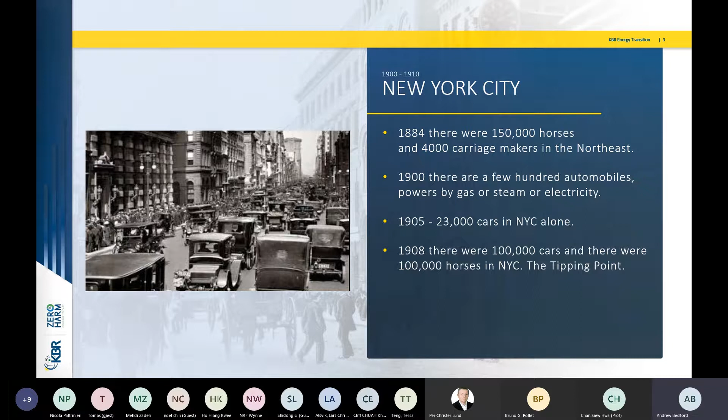Singapore, being Singapore, is planning very well for this stuff, and realizes it has to take action to meet its decarbonization targets set for 2030, then reduce as fast as possible to net zero by 2050 or thereafter. They've identified a number of ways to do this: natural gas, solar, regional power grids — which they announced in the past week or so for International Energy Week — and also low carbon alternatives that hydrogen could well fit into.

So hydrogen is not a new topic. It's obviously been around for a very long time and known about for a couple of hundred years, as well as electrolysis. There's been a lot of hype in the past, and there's been moments of hope when it hasn't quite taken off.

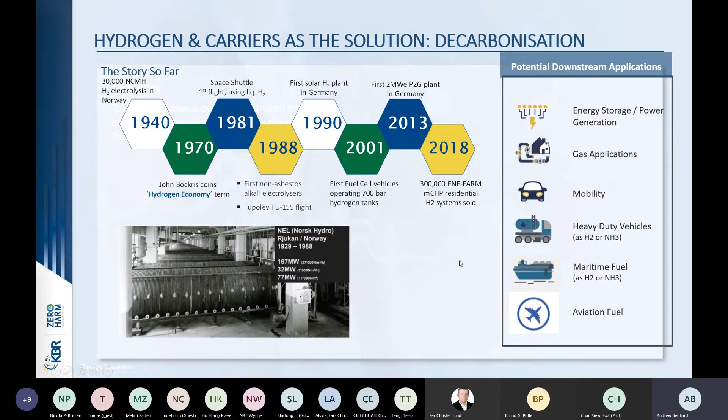KBR has been working on a hydrogen feasibility study with NCCS, NRF, and others. I won't go into those details, but I'll talk in general terms today. There's a number of downstream applications that could include power generation, city gas, mobility, and potentially bunker fuel as well, or aviation fuel with fuel cells.

So I'll sprint through this, but it looks like supply growth going forward will increasingly be renewable. It's carbon free, and the costs are becoming very competitive in most locations, especially where there's no grid. It's already the most economic way forward on the whole.

JX we're working with at the moment in Malaysia. They've got their own big plans for large-scale hydrogen production with CCS as well, to supply Japan, but perhaps the surrounding region too.

Really how it works is, as I suspect most people on this call know, there's going to be many global potential sources of hydrogen. It could be where there's existing gas with CCS, so people are discussing low carbon gas these days. For Singapore in particular, you could either bring that gas in as low carbon gas, or you could do CCS in Singapore. You could also potentially produce domestic sources of hydrogen from biogas, but that is rather limited, as Singapore has a unique context as a city-state with limited land area.

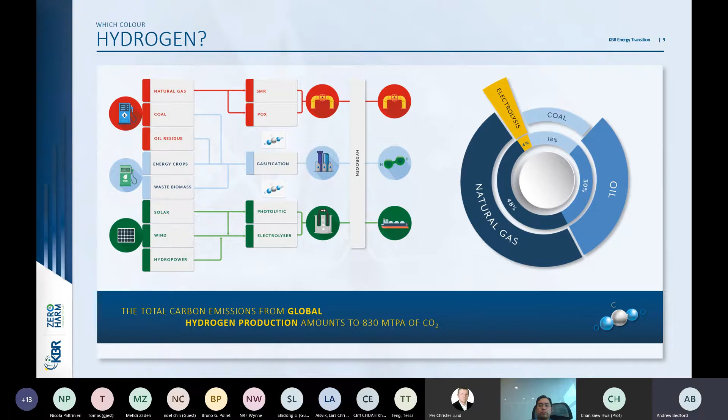Okay, so there's many colors of hydrogen, which I won't go into the details of, but there's turquoise, blue, purple. There's nuclear hydrogen production being planned. I don't expect that would really fit into the Singapore context unless there's a neighbor with that in the future. But yes, I think the vision is green at some point in the future, though it's very hard for it to compete at the moment.

There's lots of predictions about the market and also potential for methanol with carbon capture, or ammonia as a carrier for hydrogen, which could also be used directly for powering coal power stations in Japan, which they're planning up to 20% in one of those coal power stations initially as a full-scale pilot with JERA, I think. Mitsubishi and others have also already tested 30% co-firing of hydrogen in a combined cycle gas turbine, so they would be able to bring in ammonia and use the waste heat from the turbine to crack that ammonia and mix it—it'd be really HENG, or hydrogen enriched natural gas, which would be injected into the gas turbine.

The benefit for Japan would be reduced carbon emissions if it's from a green source or with carbon capture, and more diverse sources of energy.

There's very public examples from BP and Woodside and the Hazer Group and others, some of which might have potential to export. I think the difficulty will be finding those companies with the cash and the credibility to realize those visions.

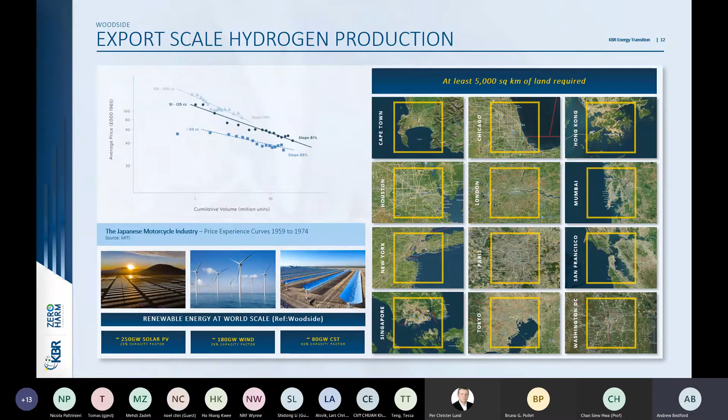So they need about 250 gigawatts of solar across that area to produce that amount of energy. And I think every year there's about 10 to 20 gigawatts of solar production, so it would take 10 years to produce enough solar panels to cover that area alone - current production, which is increasing rapidly, but not quite enough.

So it will take a while to build up and go through this transition, which makes it more likely that the blue sources of hydrogen from gas, most likely - some people are looking at coal - with CCS are more likely to win out initially, really because they're cheaper, and the technologies for carbon capture, which we've been looking at in great detail, are improving and coming down in costs.

So there's people saying $30 a ton of CO2, which is very competitive when the European price of CO2 is around $20 at the moment - so it's not far off being competitive. And Shell has recently announced their own hydrogen division of technologies, which they say is now competitive at that carbon price. So it feels like it's moving much faster than people realize, the CCS element here.

And that will probably drive the transition and ensure that that requirement for gas continues for at least the next decade, just because the scale of this challenge of decarbonisation is so big.

And then I've put this sort of process flow scheme in here as an example, whereas it's got ammonia, but it could actually be an MCH plant, which is Chiyoda's technology, or SPERA, or it could be a methanol plant combined with CO2, because any of these could be a carrier for hydrogen.

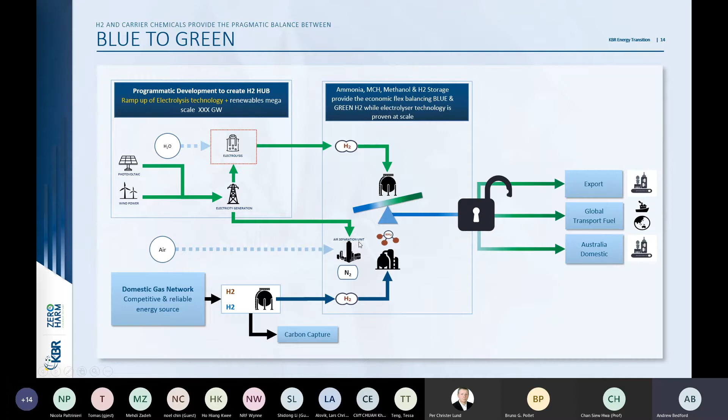But these carrier chemicals might help unlock the export supply chain, because liquefied hydrogen is currently very expensive, isn't so efficient, and there are a number of challenges around carrying hydrogen in liquefied form or compressed, for that matter.

So this slide just talks about the challenges of developing the hydrogen supply chain: its power supply, the supply chain itself, establishing it, the logistics, the offtake - who are the off-takers is often a big challenge for those Australian projects, a number of which we've worked on at concept stage. They're all grappling with that problem.

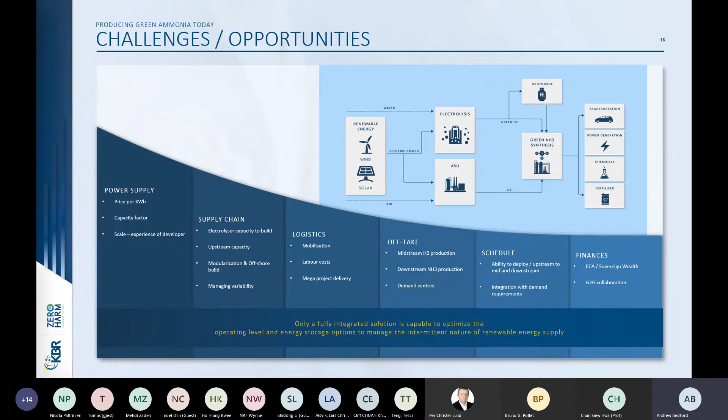So the off-taker is one issue, that you need to make the projects bankable. And often it looks like you would need government support to get any of these projects off the ground. And a carbon tax would certainly help.

Each of the carrier chemicals has their own pros and cons: ammonia, methanol, MCH, and liquefied hydrogen. The advantage of MCH and ammonia is that you can often reuse existing infrastructure and vessels, whereas liquefied hydrogen would, on the whole, require totally new infrastructure. This would suit the longer term, I suspect, as volumes of hydrogen required across the supply chain and by off-takers increase. At some point in future the volumes become so large that it doesn't become economic to move these liquids around, so you'd want to switch to liquefied hydrogen, but the point at which that happens is certainly up for debate. There are pros and cons around the other two as well, so we keep a very open mind around these.

And Andrew, we're running a bit out of time, if you can come to your conclusion. Yeah, sure, let me just check which slides I've got left.

Okay, so in Singapore itself, the challenge is how do you apply and where do you apply hydrogen first, and which sector do you give support to in terms of an off-taker? Mobility is often the highest value sector to support, where you're most likely to make some money, but Singapore is a unique situation where there isn't a big mobility market. There is some heavy haul and bus fleets that might make sense in terms of business operation security, but for the mobility sector itself, cars make just as much sense to go electric, as the distances covered aren't so large.

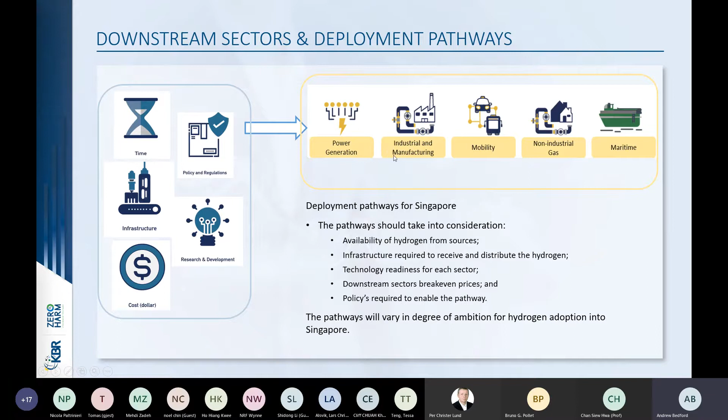I borrowed this picture from Professor Ho's slide last week at the Nordic conference, where they presented some ways forward from the NRF's perspective. They said there's potential to blend hydrogen into CCGT, and looking at turbines, hydrogen fuel turbines. There's also potential in other sectors, in particular marine, with hydrogen fuel cells and ammonia as a bunker fuel, or methanol, because most vessel manufacturers are looking at tri-fuel vessel engines going forward over the next couple of years. They're starting trials, and heavy haul vehicles, like I just said.

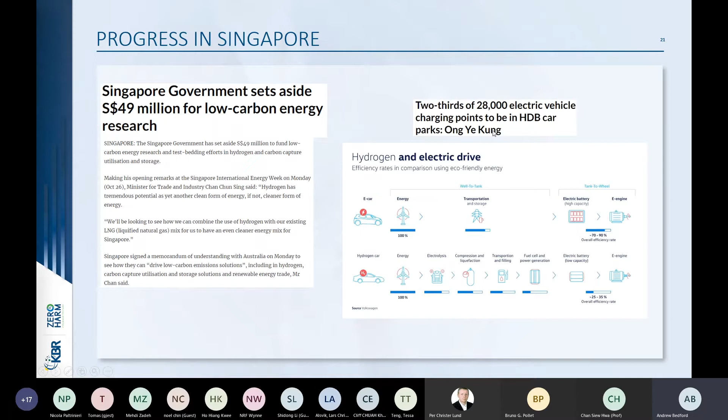So that's a very brief summary of my perspective on the hydrogen supply chain for Singapore. I just thought I'd highlight a couple of announcements in the past few weeks: the MOU between Australia and Singapore, where hydrogen and the supply chain is one of the key areas mentioned in decarbonised energy supplies, and also the electric vehicle charging network, which really supports the view that EVs make a lot of sense for Singapore for the smaller vehicles in particular.

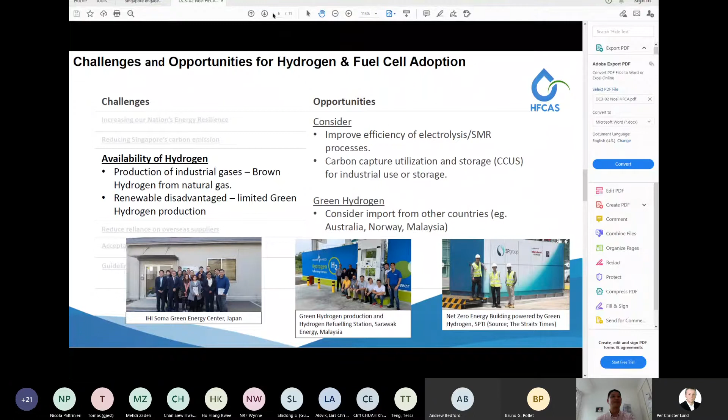Reducing the reliance on overseas supply. We have very few locally developed solutions. However, we can take heart that we have a couple of local companies who have already taken the step towards commercialization.

One of them is OneBerry, a local SME specializing in security and surveillance, providing island-wide stationary cameras powered by solar as well as methanol fuel cells. We also have Duralite Power, a spin-off from Temasek Poly, manufacturing its own fuel cell that was used for UAVs, very similar to Spectronik, which is also doing the same thing.

We also have Prof Chan and his team, who have developed numerous patents on catalysts used for fuel cell and hydrogen generation and purification. They have also collaborated with many international universities.

So the question is, can we identify a niche area where Singapore is able to develop its expertise, for example membrane technology for fuel cell as well as electrolysis, similar to what we did for the semicon industry? If we are able to identify that niche area and build on that, it will put Singapore on the map again, not just a tiny red dot, but a big blue.

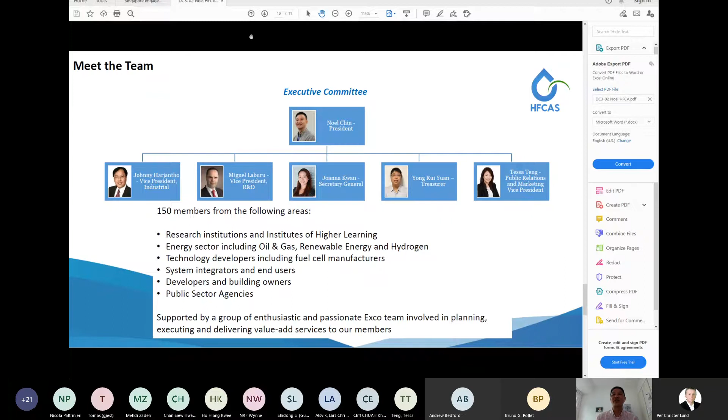Our next speaker is Professor Bruno Pollet from NTNU, Department of Energy and Process Engineering. He will make a presentation on hydrogen research in Norway. Bruno, please go ahead, if I can actually get that presentation going.

My system is actually crashing, which is not great. That's Sod's law, as I call it, yeah?

Can you see this? Yes. Brilliant. Okay, good afternoon, good morning everyone. My name is Bruno Pollet. I'm going to give you a quick snapshot on what we do in Norway in terms of hydrogen research.

First, I would like to give you a bit of a flavor of NTNU Team Hydrogen. We are actually the largest hydrogen R&D cluster in Norway, with over 40 professors looking at really the value chain of hydrogen fuel cell R&D.

We have PhD students, research students, and master students working with us. We actually tend to publish a lot, to patent a lot, and we are also open to international research collaboration and exchanges.

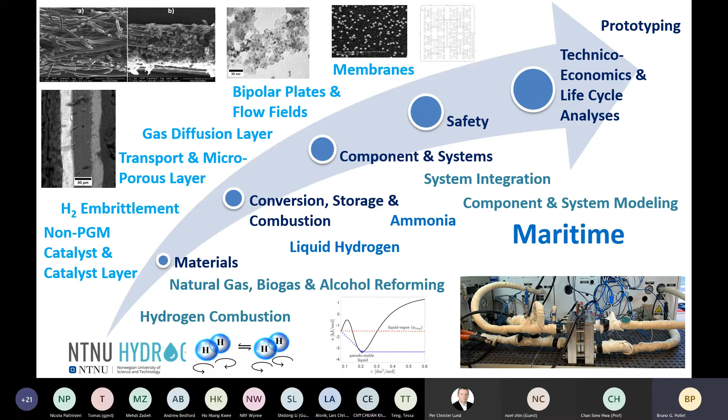When it comes to infrastructure, which is very important, we have a quite large R&D hydrogen infrastructure dotted across Norway, in Oslo and Trondheim as well. We're looking at high temperature fuel cells and electrolyzers, but also low temperature fuel cells and electrolyzers.

Each region and each university and entity has its own R&D facilities. The Norwegian Fuel Cell Hydrogen Center is split between the Institute for Energy Technology, NTNU, and SINTEF. In Trondheim, for example, where I work, we focus more on alkaline and acidic electrolyzers, and also fuel cells, so PEM and alkaline fuel cells. We're also looking at direct methanol fuel cells for portable applications, and in Oslo, solid oxide fuel cells and solid oxide electrolyzer cells.

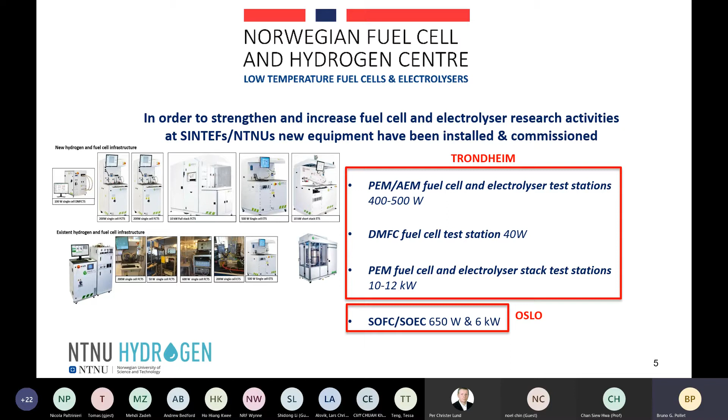We are now in the process of extending the Norwegian Fuel Cell Center to accommodate manufacturing capabilities, which is very important for prototyping. There's also other infrastructure in place for more ex situ analysis, from spectroscopy to fundamental electrochemistry for catalysis, for example. We've been quite lucky to get some very strong nanolab funding and infrastructure to look at nanomaterials and all the specifics around spectroscopy analysis.

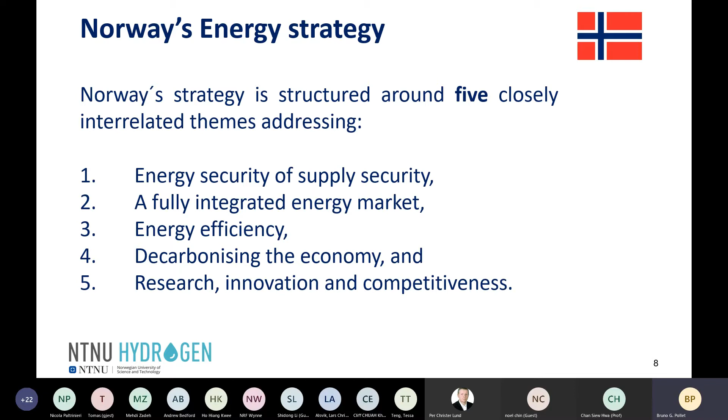So hydrogen in Norway, the strategy is structured around five themes: energy security and supply security, a fully integrated energy market, energy efficiency, decarbonization of the economy, and a strong focus on research, innovation, and competitiveness. As you know, Norway is very blessed in that 98% of our electricity comes from renewable energy sources, mainly hydropower, which is good news, and the rest from wind and thermal power. I will not mention oil and gas, obviously, as we are a big exporter of O&G.

We also have big ambitions. We want to reduce emissions by 50% by 2030, and then we want to reduce them by 95% against the 1990s figures.

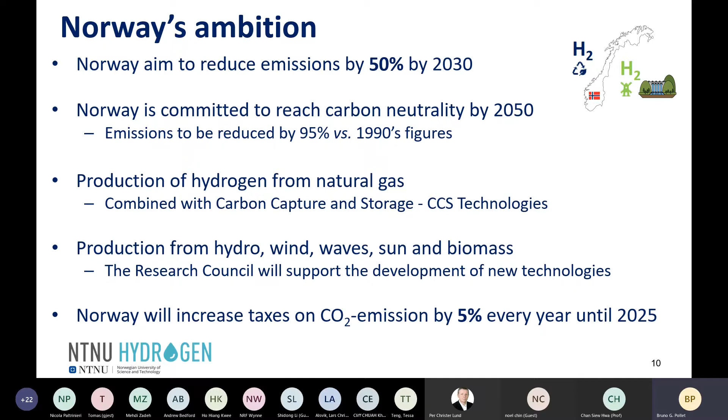We have a focus on two types of hydrogen. I call it blue hydrogen, from natural gas combined with carbon capture and storage technologies, which we are very strong at. And obviously green hydrogen, trying to capitalize on hydro energy, coupled with water electrolyzers. Norway also wants to increase taxes on CO2 emissions by 5% every year until 2025. So as I said, the two focuses here are blue hydrogen and green hydrogen.

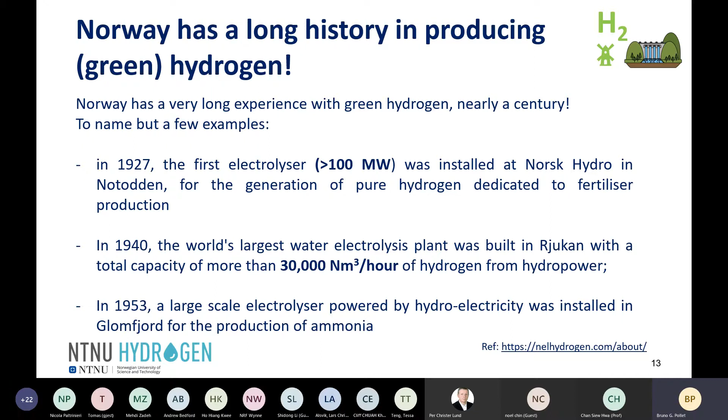This is quite understandable, because this is nothing new for Norway. As was mentioned earlier, we have a real history in producing hydrogen, in fact green hydrogen. The first electrolyzers installed were at Norsk Hydro in the late 1920s, with 100 megawatts. Now we've moved on to bigger beasts, large-scale electrolyzers for the production of ammonia, used for fertilizer. You can go on LinkedIn and also see Nel Hydrogen, one of the largest electrolyzer manufacturers, who has signed an agreement in Spain with a fertilizer company for a 20 megawatt electrolyzer installation.

In terms of the Norwegian government, there are four objectives: increasing the number of pilot and demonstration projects of hydrogen and hydrogen-based solutions in Norway, contributing to the establishment of a comprehensive value chain for hydrogen in Norway, facilitating the use of hydrogen in new sectors, and ensuring further technology development to reduce production costs. This point, number four, is very important. And obviously the objective is to create more green jobs and facilitate the creation of new value.

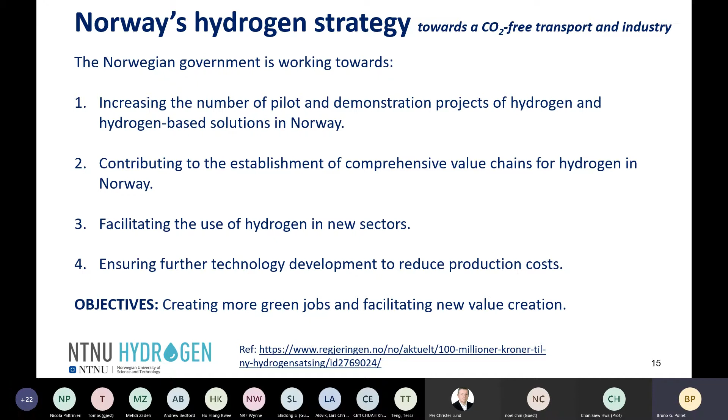This is important to different sectors, not only maritime, but also automotive and stationary applications. According to the Nel Hydrogen company, if we want to address this shortage of green energy or hydrogen production, we need about 4,000 gigawatts of electrolyzer capacity, which is quite huge. So there's a lot of scope for new companies or industries to get their hands into that.

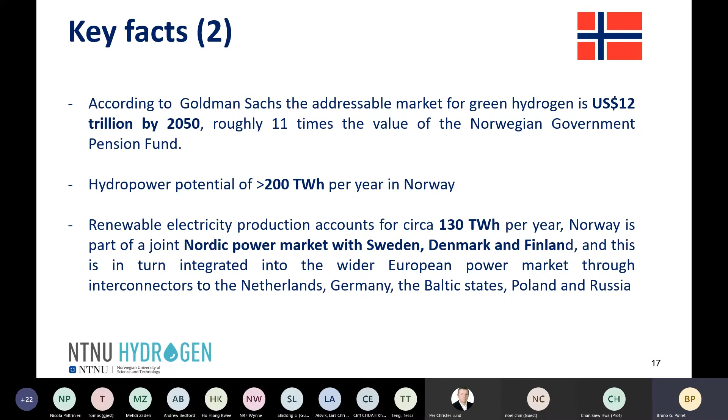When we look at green hydrogen, we're looking at about 12 trillion by 2050, which is basically more or less 11 times the value of the Norwegian Government Pension Fund. In terms of the potential of green energy from hydropower, about 200 terawatt hours, which is quite huge when you think about it. This is something to bear in mind.

We are very blessed to have two major big companies. One is Statkraft, which is Europe's largest generator of hydropower, wind power, and solar power. The other is Nel Hydrogen, as I said earlier, which is one of the top-notch and largest manufacturers of electrolyzers. They focus on alkaline electrolyzers but also PEM water electrolyzers. Equinor also has quite a stake in this hydrogen production, through natural gas and CCS.

This is a map that Sintef and my team put together showing who are the main players in Norway in terms of hydrogen, from industry to research and education, and others. It's quite substantial. When we put that together, I was quite surprised, but happily surprised. Different companies and research institutes are focusing on hydrogen, from basic research to more developed R&D to higher TRL, with a focus on different sectors, which is great.

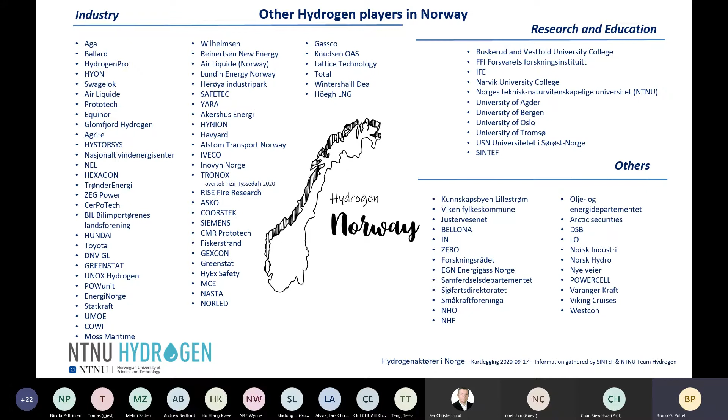So in terms of this, we are also developing projects. We have projects in local Norwegian islands, for example. We have the Haeolus project, funded by the EU Council, the European Union FCH-JU, focusing on producing hydrogen. The objective is to have 1 ton of hydrogen per day, generated from a 2.5 megawatt electrolyzer, installed in a very remote village called Berlevåg in Finnmark, powered by wind energy, which is very interesting.

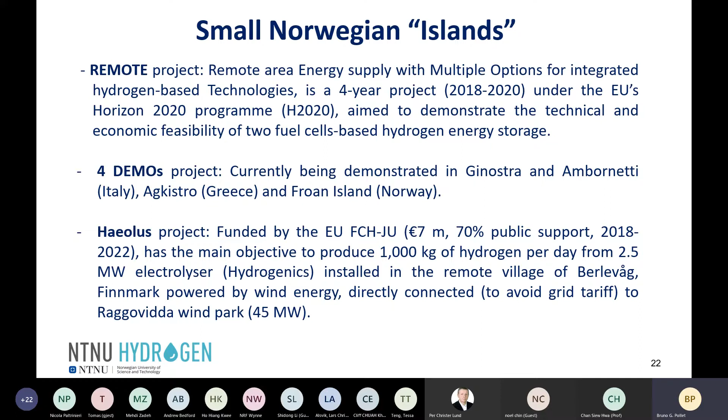I will not go through all these projects. As I said, I will give you this as a PDF, but for those who want more information, I have a special Word document on this, so please feel free to contact me.

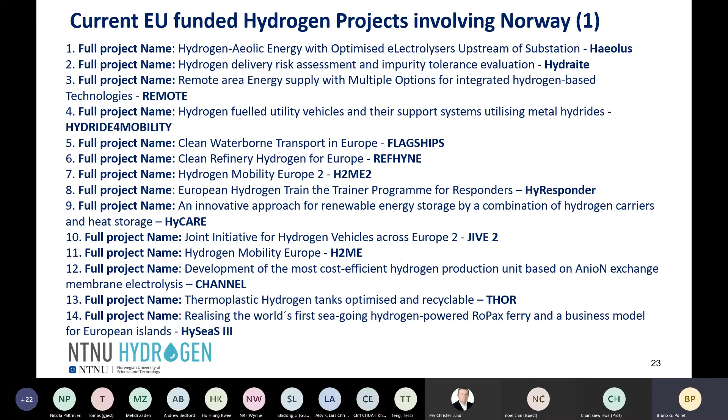I can give you quickly a short overview of one project funded by the EU, the European Union. It's called Channel, which is really pretty much looking at moving away from alkaline or PEM water electrolyzers, and it's based on anion exchange membrane electrolysis. Okay, I think that's enough time here.

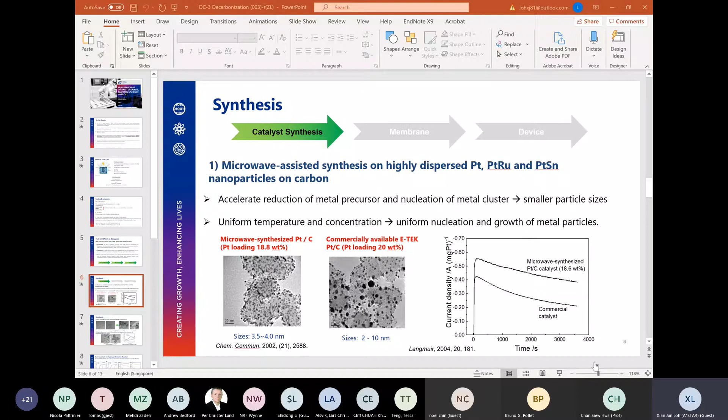Hi, good afternoon everybody. I'm trying to share my slide. It seems a little bit stuck here. Oh dear, can you see the slides? Yes, we can see the slide called synthesis, at slide 6. That's a problem, I can't move. I can't move anything. Hang on. Let me... well, don't trust the technology fully. Let me just restart again. Apologies for this, it's strange, it happened to me too. It just got stuck for some reason. I have the same problem with Teams. The same here actually, it's not the first time. Okay, yeah, looks good now. Oh, it's my first, I just press the slideshow. Can I trouble someone to... oh it's okay, yeah, alright.

Yep, good. Now, good afternoon everybody. I would like to give a very brief presentation on hydrogen research at A-STAR. This covers catalysis, material science, as well as the carbon utilization aspects.

I'd like to first give credit to the main scientist working on this topic, Dr. Liu Zhaolin, a senior scientist located in IMRE A-STAR. His research is on electrocatalysis, energy storage systems, and fuel cells—I'll talk more about his fuel cell work later. He's well recognized, and recently pioneered layered structured cathode material in lithium-ion batteries, as well as working on microwave-assisted synthesis of nanoparticle catalysts, usually for fuel cell applications, and developing oxygen cathode catalysts for rechargeable metal-air batteries. He's quite well known in the field, has received awards, and has done quite a few industry projects with companies.

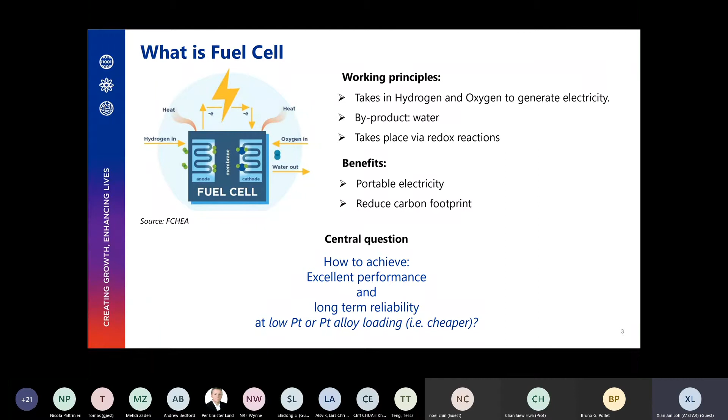But the key challenges remain in the area of fuel cells. One is how do we achieve excellent performance as well as long-term reliability at very low catalyst loading. We want long-term reliability so the lifetime of the fuel cell pays for its own application, and we want to use as little of these precious metal catalysts as possible so it can be more cost effective. We can talk about high performance, but usually at high catalyst loading it doesn't make much economic sense. So for fuel cell catalysts, the critical issue is how do we tune the particle size and control the shape.

Shape matters—we could design the shape of the nanoparticle to have extra surface area in contact. And what about composition? Can we alloy this to get better performance? When talking about platinum catalysts, the main problem is that carbon monoxide binds tightly to the platinum surface and blocks the active site.

For the other types of bimetallic catalysts, there are bifunctional mechanisms where one portion allows you to do hydrogen oxidation or oxygen reduction, and the other side will actually provide for the oxidation of your carbon monoxide, which is adsorbed onto the sites.

At the Institute of Materials Research and Engineering, we have done quite a lot of fundamental research in this area, and we have a good idea of how such catalysts work. A lot of this work has been championed by Professor Chan Siew Hwa, who is a pioneer in this field in Singapore, through the fuel cell program that started around 2007 to 2009.

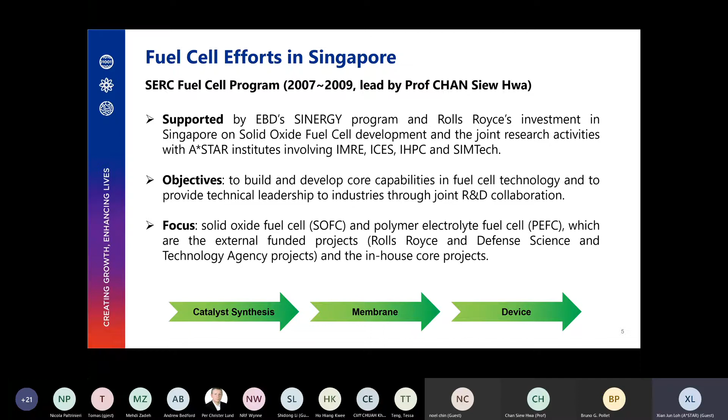In the area of catalyst synthesis, where we spent a lot of effort at that time and still even now, we're trying to develop very highly dispersed nanoparticles on carbon. This is a form of catalyst which is by now quite well established in this world, but if you look at our papers, we actually started looking into this as early as 2002.

We're trying to accelerate the reduction of the metal precursor and the nucleation of the metal cluster. So how do we design smaller particle sizes? This really has to go hand in hand with the characterization tools that we have. We are currently also working on state-of-the-art transmission electron microscopy techniques to try to characterize and understand better how such catalysts work.

We also want to create uniform temperature and concentration such that these nanoparticles can grow evenly and you get very consistent performance. Even then, in the early days, we have managed to outperform the commercial catalysts in terms of current density.

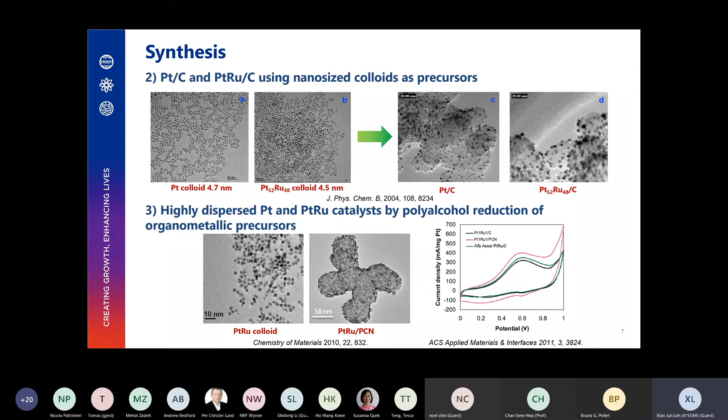Later work focused on using nano-sized colloids as precursors. Some images are seen here; they are very well dispersed, and the particles have a very fixed size. This is good for consistency in performance. We have also obtained highly dispersed catalyst by polyalcohol reduction of the organometallic catalyst precursors.

Next, the other portion that is very important is the membrane part. When we think about a membrane, we usually have different types: there's ceramic membranes and there's also polymeric membranes. The one that we are working on is actually a perfluorosulfonic acid and metal oxide type of membrane.

It's an oligomeric polyhedral silsesquioxane type of hybrid membrane, so it's an organic-inorganic type of hybrid membrane. This sort of proton exchange composite membrane has high stability and also higher lifetime.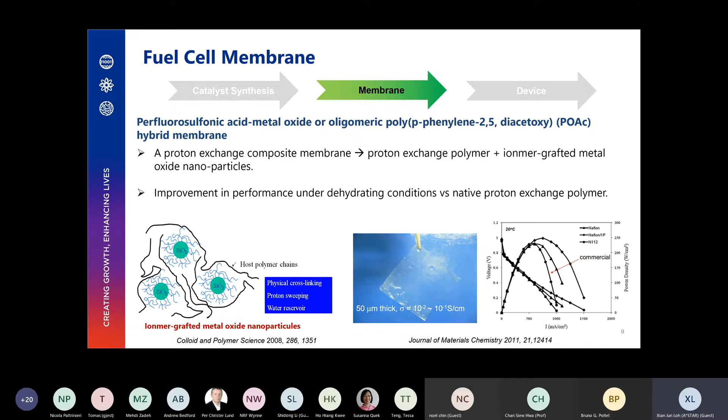And finally, after working on the catalyst and the membrane, we want to package everything in the form of a device. Now this is where the challenge comes in, because when you look at the structure of the electrode, you have to think about things like carbon paper, a diffusion layer, a catalyst layer, and of course the electrolyte. And then how we pack these things together in a confined space.

This involves a combination of the membranes. You do have to do the membrane electrode assembly as well as the PEM-FC assembly. And then this gives you a very modest 1 kilowatt membrane stack.

With such fuel cell devices, we did very, very simple proof of concept demonstrations in the past, mini fuel cells that can power things like radios, hybrid membranes.

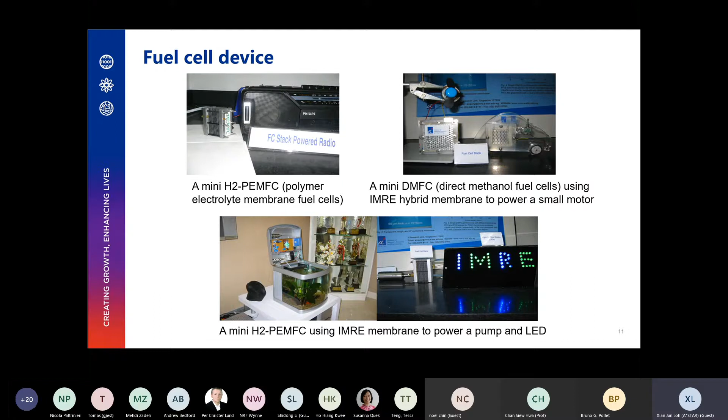And of course, we look forward to more types of collaborations with partners around. So just right, I've come to the last slide. And over here, I'd just like to acknowledge support from A-Star, as well as ST Kinetics, and DSTA. And of course, thank you everybody for your attention today.

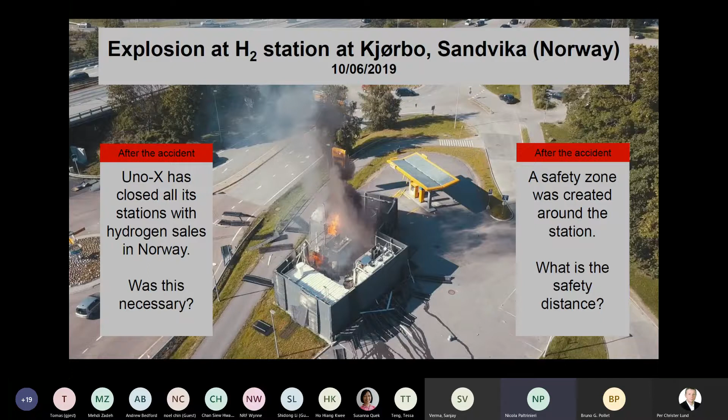Probably there has been a way to ensure safety in a transparent way, but also a way to support, let's say convince, the stakeholders that hydrogen was managed in an appropriate way. So the closing of all the hydrogen stations in Norway has also been in the perspective of making the stakeholders aware that things are being handled as transparently and as safely as possible.

But hydrogen is not necessarily less safe than other fuels. The thing is, we need to put in practice the right safety measures to control this hydrogen. The characteristics of hydrogen are different from other substances, for example hydrocarbons. So the problem is, are the practitioners aware of the potential accident scenarios related to hydrogen and hydrogen technologies? Experts like me and you are aware of some peculiar characteristics of hydrogen, but are all the practitioners, all the operators handling hydrogen every day, fully aware of this? Please proceed.

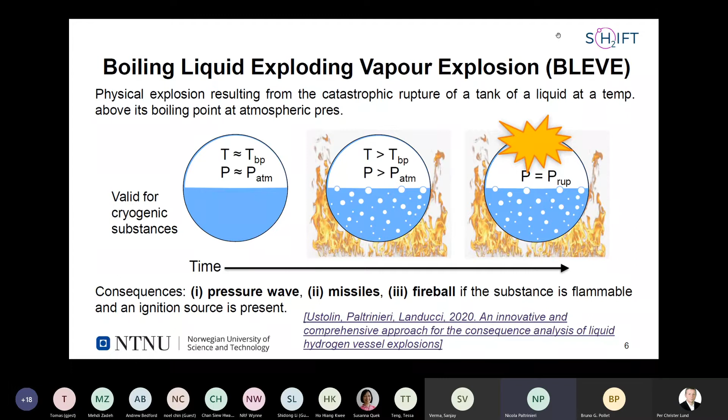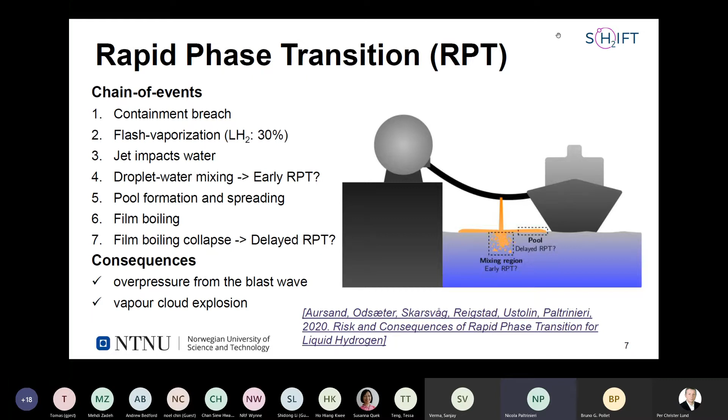Another example of accident scenarios that might be considered atypical for hydrogen is the RPT, rapid phase transition. Also in this case we might have a physical explosion, meaning an overpressure given by the sudden evaporation of hydrogen. In this case it's more like liquid hydrogen leaked onto a substance like water, as shown in the picture, which increases the heat exchange between the two substances and might lead to an early or delayed rapid phase transition. This phase transition, from the liquid state to the gas state, might lead to an overpressure, an increase of volume and then overpressure. Of course there can always be an ignition as well, since we have a highly flammable substance involved that can lead to fire, flash fires, or vapor cloud explosions.

The problem with these two accident scenarios is that even experts are not fully sure whether they are going to occur or what the actual conditions are for them occurring, because there is quite a lot of experience on hydrocarbons related to these accident scenarios, but for hydrogen there is little experience on this. For this reason we are running a national project called SHIFT, Safe Hydrogen Fuel Handling and Use for Efficient Implementation, that is studying these accident scenarios, running experimental tests and validating some modeling we have already performed.

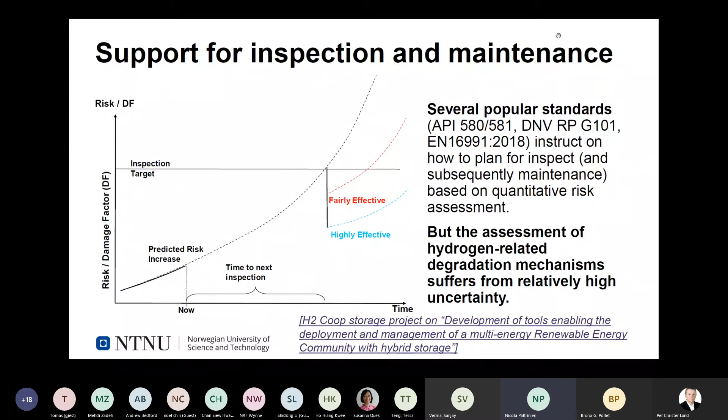There are very consolidated standards on inspection and maintenance planning based on risk. The idea is I assess the risk in my system, I predict a risk trend for the future. Once the risk reaches an inspection target, I run an inspection to understand whether I overestimated the risk, and this is quite common because of uncertainties, so we tend to be conservative. Or maybe I confirm the risk was as predicted and apply some maintenance in order to lower the risk.

The problem is that these approaches rely on degradation mechanisms of materials that are not specifically for hydrogen. These damage factors you might see in the middle of the figure are not fully describing the hydrogen attack, blistering, metal hydride formation, so the material degradation given by interaction with hydrogen, which means we have more uncertainty in this evaluation of risk.

So we are even more overestimating risk, and we might then need to run more frequent inspections in our system.

We have seen that it's very important to have a good understanding of materials behavior in contact with hydrogen, so how material sciences may help in the safety evaluation for hydrogen technologies. But...

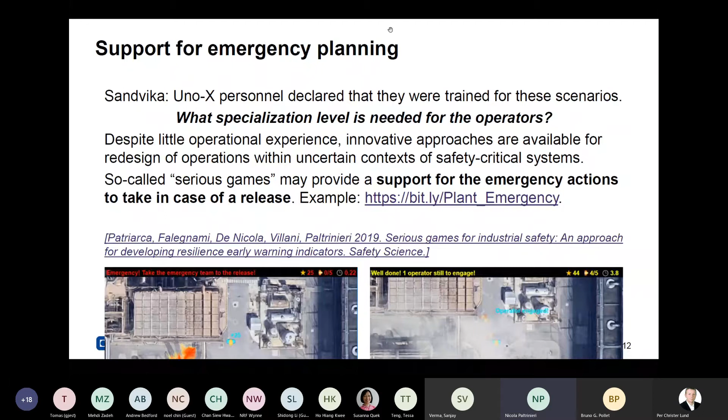What we also need to know is to support other types of operations, not only inspection and maintenance, for example emergency planning. We have little operational experience on hydrogen, so we might need to rely on advanced techniques for training our operators, like simulations, serious games, and examples like you see in this slide.

To conclude, safety assessment should be considered as an enabler for hydrogen technologies. We have knowledge, we as experts on hydrogen characteristics and how hydrogen behaves in these accident scenarios, but are the operators, are the practitioners aware of this?

Especially if we look at the consequence analysis, the accident scenarios that may occur after release, or the materials integrity, there are some mechanisms not fully considered by standards or by current operations by practitioners. So we need to increase our knowledge on this in order to fully make these technologies grow.

And of course, we need to train the operators in order to be able to both operate these hydrogen technologies and react in case of emergency in an appropriate way.

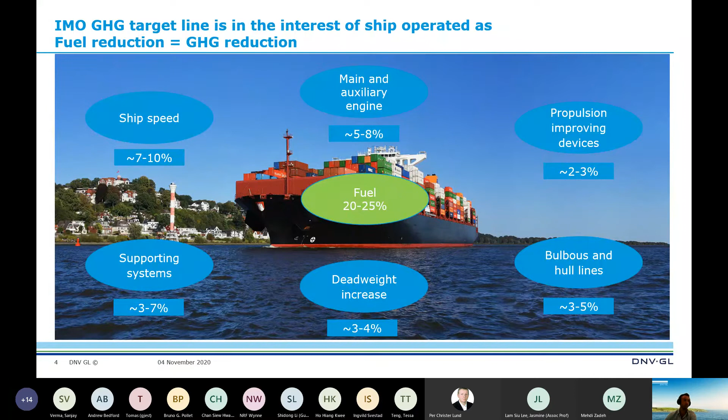There are so many things that impact this, but today we're talking predominantly about hydrogen and how this impacts things, and the same is true for our study—it's focused predominantly on fuel, and there's a reason for that. Fuel is the biggest saver for greenhouse gas reduction, I think that's obvious. Ships can always become more efficient in how they're run and how they sail, but fuel is the main factor, and that's the same for everything. It's no different to cars, right? So that's why that is a major focus.

So what does this entail? Well, there are a lot of factors, but we see large uncertainties, in particular in fuel availability and costs, trade demand, and regulations, which make it difficult to make just one or a few scenarios, which is what we've done in the past. So this year we've done 30 different scenarios of what the future may hold.

Three key uncertainties which affect these targets are policy measures—this includes carbon pricing, technical and operational requirements, potential carbon limits, and much more. Another factor is fuel prices, and also naturally the demand. Different fuels are becoming more available, and who's going to use what fuel depends on how technology develops.

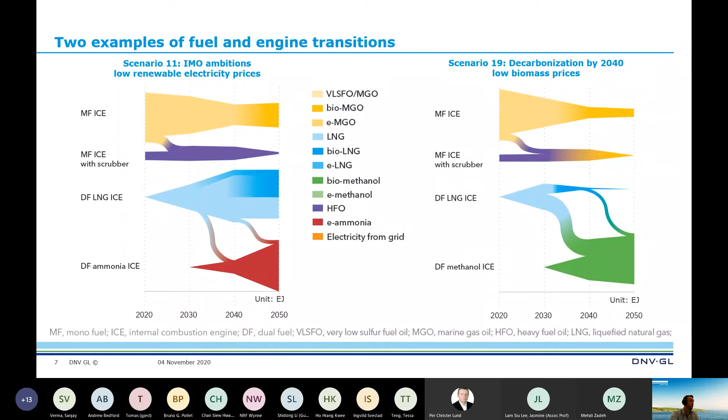Why am I bringing this up? Well, it just shows pathways going forward, depending on how prices develop, availability develops, and the ambitions of IMO and other factors. But what's worth noting next is, if we just take an outside perspective and look at it all, it comes down massively to fuel flexibility and bridging technologies.

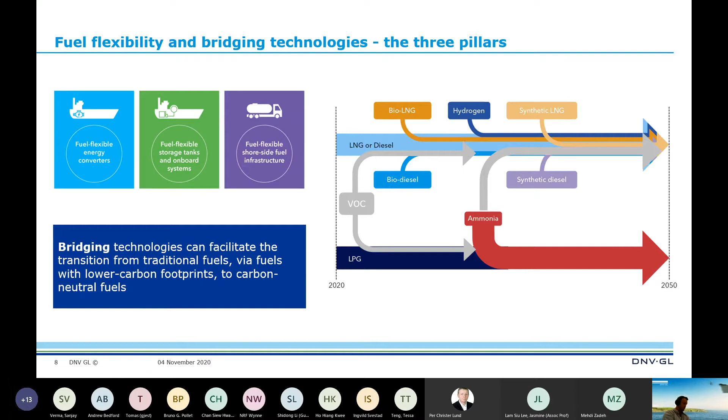We still have a long way to go. You can see here, LNG or diesel being the current format in 2020, with LNG being that pathway as I've already stated. Then you see the drop-ins from fuels like bio-LNG, hydrogen, synthetic LNG, ammonia, and biodiesel, which will all have input in time to come as dual fuel combustion engines and alternative fuel ready solutions develop over time.

How fast can we make the transition? Impossible to say, but we're going to have to make some changes, and this depends on what influence we have. Again, we've talked about IMO before, but also the requirements of potential charterers and the likes. They have a huge influence on the pathways ship owners and ship managers take in the future.

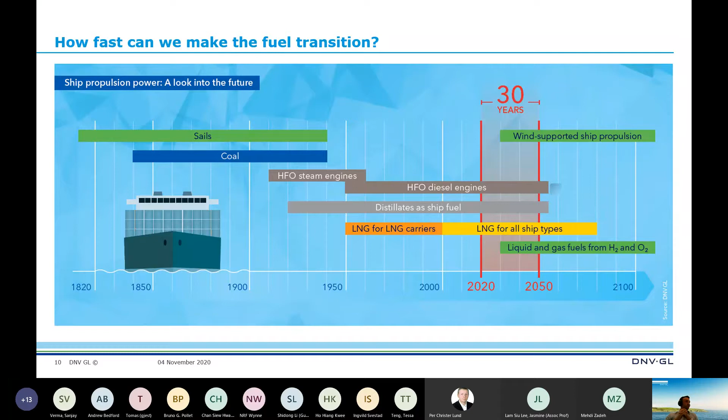Currently, what we see from these studies, I've given you two examples, but from the 30 studies, with the forecast to 2050, we see carbon neutral ammonia and methanol as the most promising fuels up to 2050. Obviously this is hard to determine. In a no-decarb scenario, fossil fuels dominate naturally, but when decarb pathways are considered, we see a rapid decline as fossil fuels are phased out. In the most ambitious pathways, decarb by 2040, there are no fossil fuels by 2040, and the transition will heavily impact today's shipping.

Ammonia and methanol, for now, offer the best balance of production costs and onboard engine and fuel system costs. The primary energy prices of biomass, renewable electricity and fossil fuels determine which of these are most favourable. If we have large volumes of biomass available, we expect biomethanol to dominate, while if we have large amounts of renewable electricity or low fossil fuel prices with carbon capture and sequestration, we expect ammonia to be the preferred fuel, and hydrogen will dominate too.

Carbon neutral MGO and LNG are expected to play a significant role as a transitional fuel, in particular in the decarbonisation 2040 pathway. They are the main factors in terms of a transition from now to then.

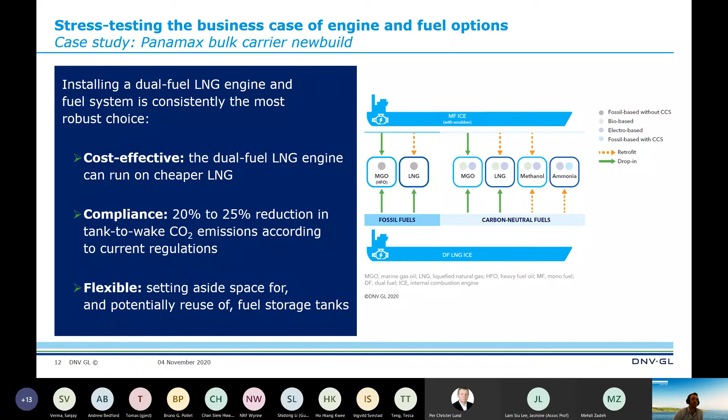So another main factor, to start closing this out, in order to get there with the likes of hydrogen - and the speakers following me will tell you more about those solutions - it requires a lot of cohesion across the industry.

There's a lot happening today in the maritime industry. There are schemes providing favourable long-term financing to green ships, be it Poseidon Principles - you can look that up - green bonds, and also risk-sharing mechanisms to reduce the risk for first movers, those that want to take action now and get ready for the future. Again, very important, you can look up Horizon 2020.

Regulations to incentivize uptake of new solutions. There's naturally a need for clear and long-term regulatory signals before we can expect any changes to ship technologies and fuels, but these are coming. With IMO making big statements, you can tell that change is needed. As mentioned before, the likes of carbon pricing, performance requirements, perhaps mandatory use of carbon neutral fuels - similar to the fuel sulfur limits we currently have in shipping - and standards to measure and compare performance. All these things are building blocks for regulations and incentive schemes.

Moving on, managing decarbonisation risks is critical to optimise ships' earning potential and asset value. We can't do anything if we can't afford it - that's just a fact of the industry. So things need to develop and become more cost effective as these technologies develop, which they are. The important questions to ask are: how soon will decarbonisation start? When will carbon neutral fuels be available and at what prices? What do charterers and financiers require? These are all risks critical to optimise ships for their earning potential and value.

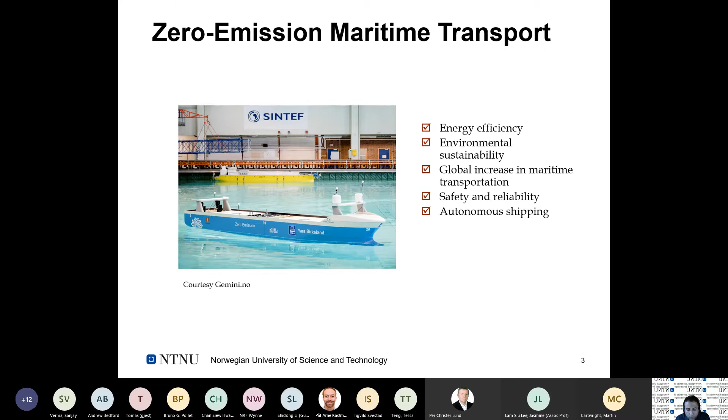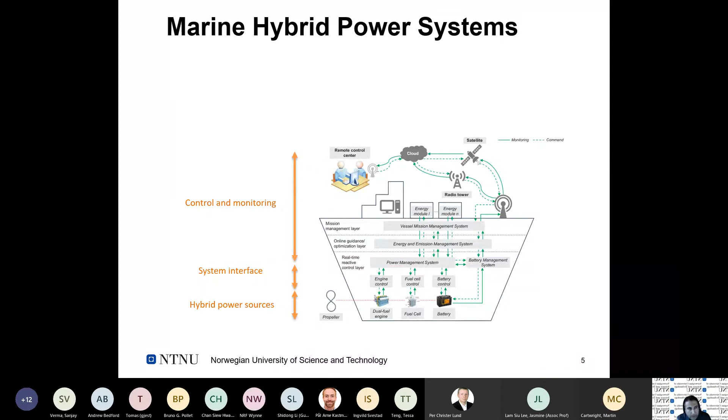I'd like to mention a few examples, like zero emission short sea shipping solutions through pure battery and plug-in hybrid. We have hybridization through getting charge from shore to onboard battery, which is interesting for Norway because almost all the electric power generated on shore is from hydropower, which is green. So we can easily call it green transportation when we're discussing plug-in solutions from shore.

But then how to, for example, charge the onboard batteries efficiently from shore to the ship is already a research and development challenge.

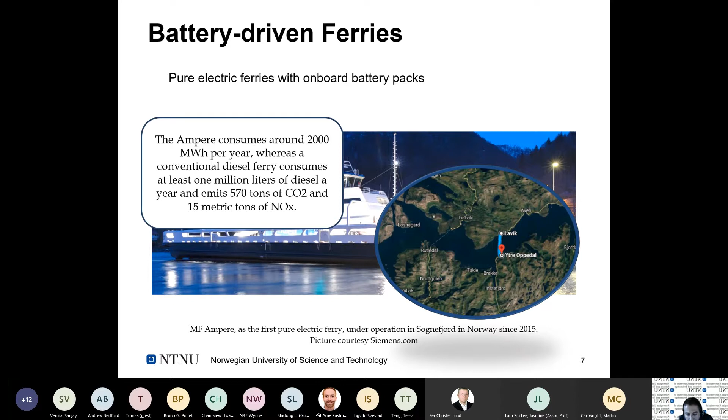As an example, MF Ampere was the first pure electric ferry under operation in Sognefjord, Norway, since 2015. It goes a very short route, about half an hour or even less one way. But still you can save a quite significant amount of CO2, getting charged from both sides with just a 10-minute stop.

To the next example, large-scale hybridization and electrification of marine vessels, which, as I mentioned, we do with the still use of engines or next generation engines together with the battery, and electrification for autonomy and sustainability, mainly for autonomous ferries and a very good solution for urban transport.

As an example, you can see the NTNU prototype, the first prototype urban water transport through an all-electric and autonomous ferry. And then again, we have the research challenge of battery charging, power system design, and control.

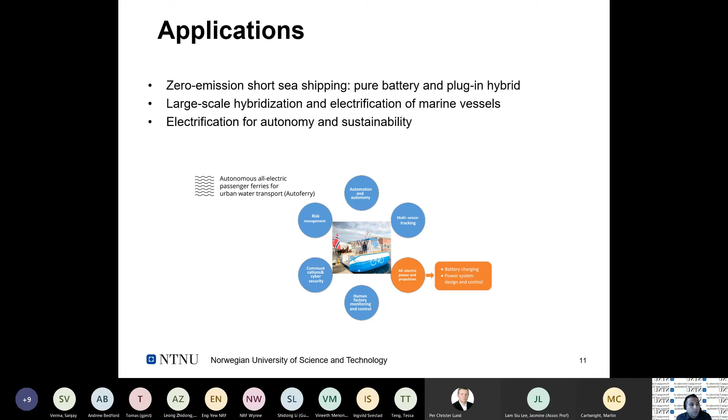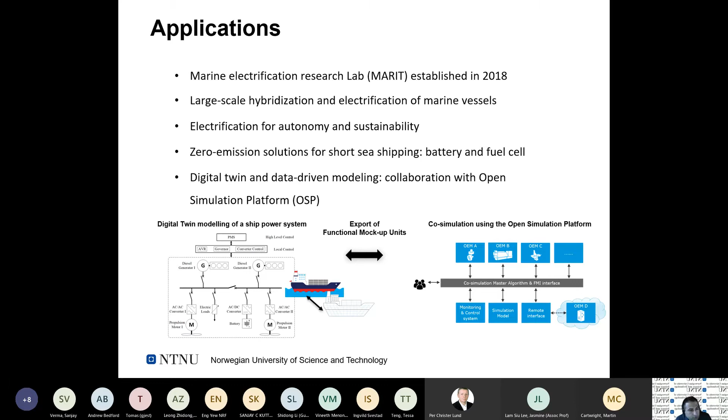Examples of some energy management, fuel optimization, and you can distribute quite demanding and fluctuating load profile between the fuel cell and battery, so to get the best of both, actually, to the digital twin and data-driven modeling towards the digitalization of ship power and propulsion.

Here I would like to mention an example of collaboration between academia and industry as a research-based innovation center, called SFI in Norway. That is quite a consortium of industry and research partners. In this case, NTNU is working with SINTEF as the research partner and with a pool of industry towards improving energy efficiency and reducing emissions.

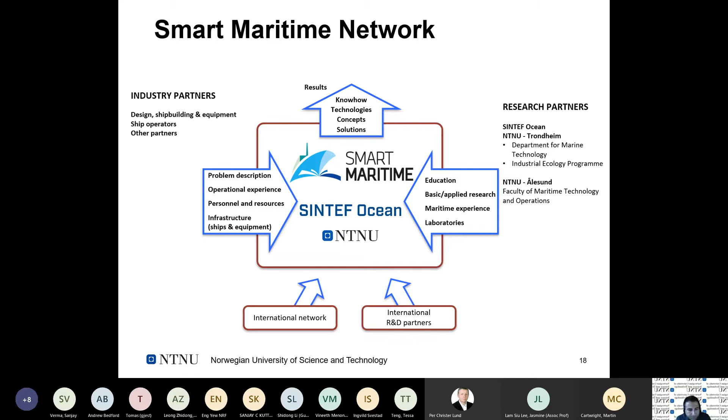So we have different sorts of industry collaborators, from design and shipbuilding partners to ship operators to suppliers of components and equipment. A quite wide range of industry, from Rolls-Royce and Kongsberg to Wartsila, and to ship operators like Wallenius Wilhelmsen and other partners.

So here we have an R&D line of developing low and zero emission solutions, from the feasibility to the ship design, hull and propellers, to power system and fuel optimization, where we test different types of power system topologies and power sources, like again fuel cell and battery, also including ship system integration, validation, and environmental and economic due diligence with use cases and business studies.

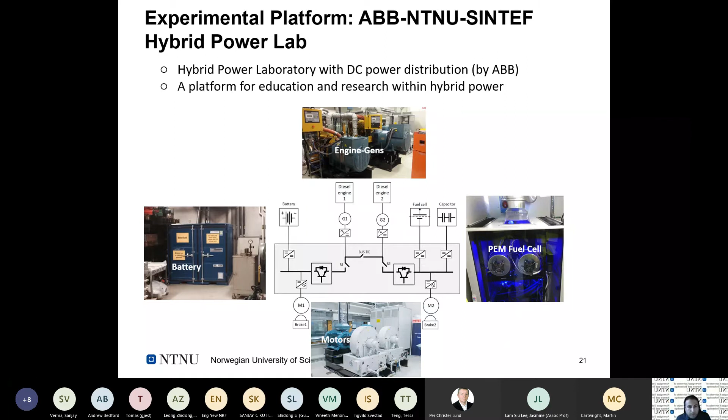As an example of an experimental platform, I mentioned in the beginning of my lecture the hybrid power lab, which is a prototype of ship power and propulsion. We use a DC power system or DC switchboard to connect the engine gensets with battery at one side and PEM fuel cells on the other side, then feeding two motor loads as electric loads, the end user of electric power, although we have quite a small fuel cell package, 2 packs of 30 kilowatt, but it's still for the sake of demonstration.

So then these solutions can be also extended to, for example, fuel cell, hopefully in the near future. Thank you for your attention.

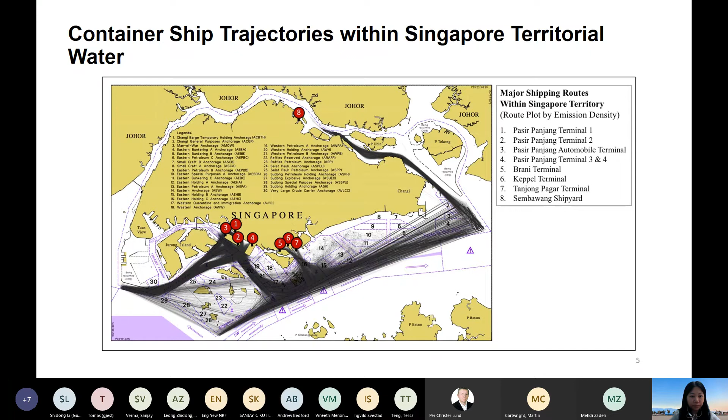In our center, we have used AIS data to analyze ship trajectories. This is one example in terms of container ships, showing how busy the port is. You can see ships are very intense in certain areas, particularly in fairways or where ships have to berth at particular designated terminals. And also, the next.

So that's why in the center it's very relevant that we study alternative energy sources, or actually it includes hydrogen, but also, let's say, LNG, methanol, biofuel, etc.

When we analyze energy sources, we focus on the chain approach. That means from generation, for example feedstock, including the type, availability, usage, production technologies, capacity, cost, and any other concerns. Then to transportation, including storage, logistics, safety, and regulations.

So this is very important because we are not just talking about lowering the emission on board. We talk about also, for example, from the life cycle assessment approach, and also how feasible a particular alternative fuel is when it comes to, for example, bunkering at Singapore.

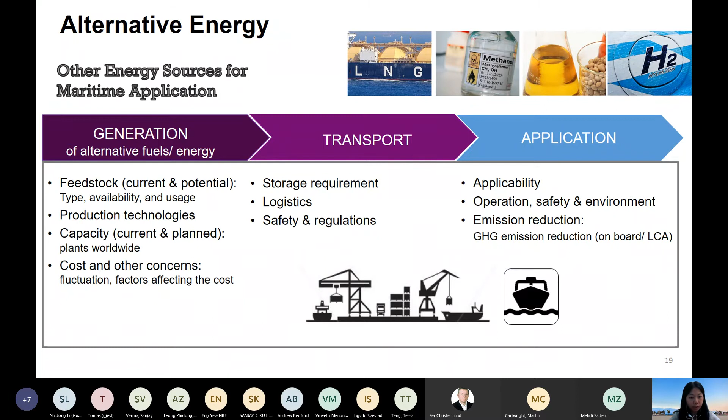And in our center we also conduct different types of, let's say, feasibility or emission reduction potential studies. So this particular chart focuses on or summarizes different types of fuels. On the left side of this chart, you can see basically we have the current solutions, which is heavy fuel oil, marine gas oil.

Then later on, those are the alternative fossil-based fuels. And then here, biofuels. And then this group is non-bio renewable hydrogen. And then we even analyze nuclear and try to compare them.

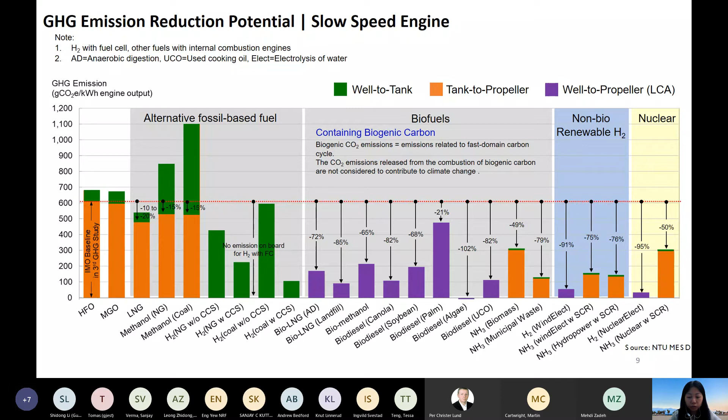So if you see that the reduction is high, that means the potential is very much better, and it can fit the longer term IMO strategy 2050's targets more. So I'm almost ending the talk.

And then lastly, this slide somehow to a certain extent summarizes some key efforts to pave the way for low carbon options in Singapore. In Singapore, for both ports, PSA and Jurong ports, they have living labs for green technologies, meaning that it's not just about research at, let's say, universities or research institutes, but really test bedding. And in fact, decarbonization and digitalization come hand in hand to improve integrated services and efficiency, including energy efficiency.

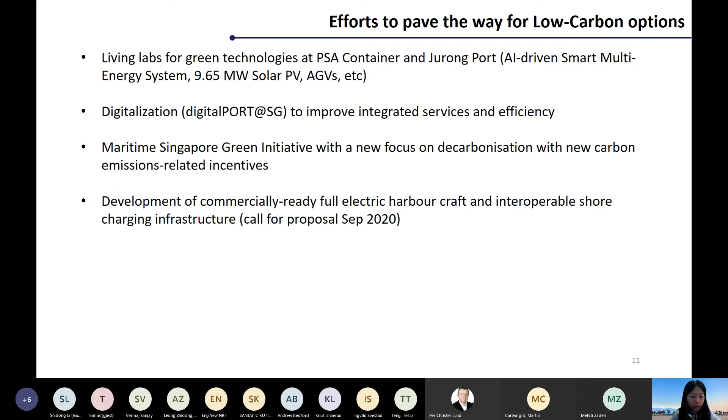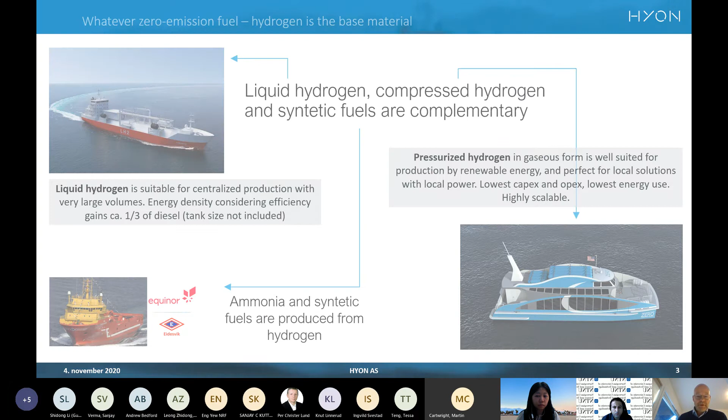What we do is supply integrated hydrogen storage systems. A yard and a designer can really turn to us - this is important for the market to note - to get complete fuel systems designed for their vessels, in joint collaboration with our owners. We can provide the tank storage system, fuel distribution, ventilation, safety system, gas detection, extinguishing - all these issues solved. And the same with fuel cells, we can provide turnkey solutions for vessels.

Going to fuel cells, just to give an example of how the maritime solutions look - PowerCell has the world's largest energy density fuel cell. They have proprietary technology which makes them more compact and lighter than competitors, including Nissan, Toyota, these kinds of companies. So they have highly interesting technology.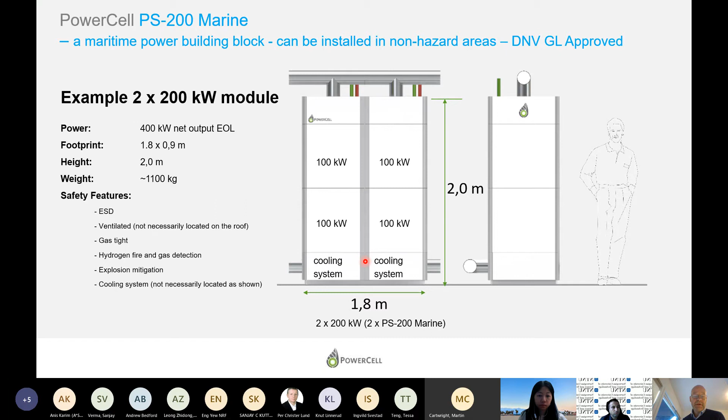The way we will implement this on cargo vessels, in new buildings, is we will see a small part of the aft deck being isolated from the rest of the ship and specifically tailored for storage of both the hydrogen and the fuel cell container. In this case, everything is stored above the main deck.

This is typically 20, 30, or 40 foot ISO containers with hydrogen bottles, a standard off-the-shelf product from Hexagon. We will modernize that in time, but the product as such is already there. You stack them up like this, with a separate fuel cell container, and all this is on the aft part of the vessel. It's not taking that much space, and it's separated from the cargo and the crew.

Doing it like this gives us a lot of safety measures. There will be airlocks for the fuel cell container, and the mooring winches will be EX certified. There will be no ignition sources within the hazardous zones, and the vent, inlet and outlets will be outside of the hazardous zones. The vent inlets will include fire and gas dampers and gas detection.

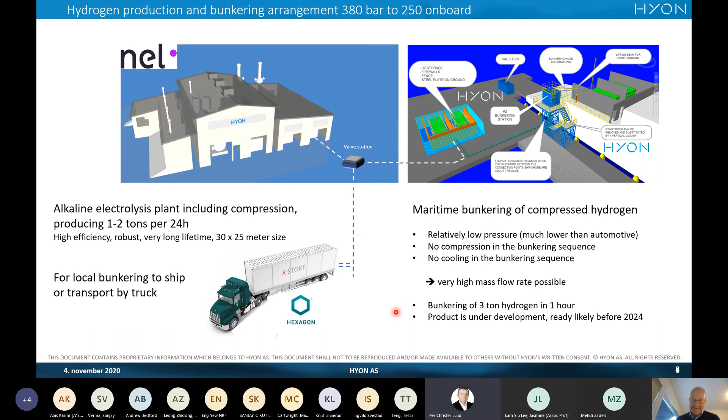Some of the ongoing projects we're working on with the industry: we are working specifically on aquaculture vessels. We have an ongoing project called Sea Shuttle, which is a cargo container feeder vessel. We have an ongoing high-speed vessel project with partners called Zero Emission Fast Ferry, ZeFF. We have the HeidelbergCement/Felleskjøpet cargo vessel. This is an ongoing tender, and we are part of the applications there, and we'll see if we are the lucky winners later this year.

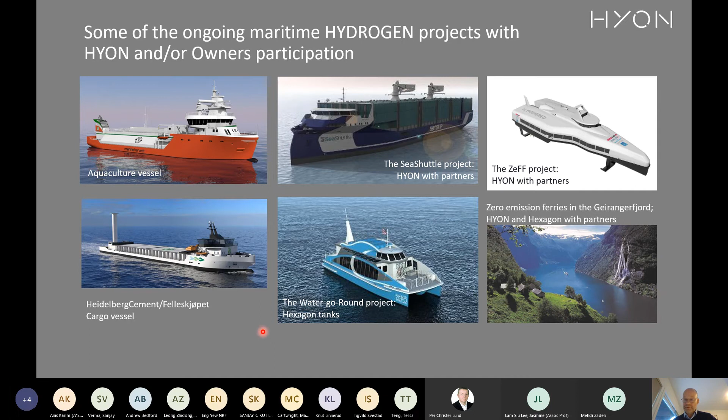Our owner Hexagon is working on the Water Go Round project in California, so you will see the Hexagon tanks on the top of the vessel here. This vessel will likely go on stream on water later this year. We're also working on ferries and aquaculture solutions in projects in the World Heritage Fjords, using local power to produce hydrogen for local ferries and aquaculture equipment. This gives a flavor of the things happening from our side, and we look forward to continuing the journey with hydrogen. I think that concludes my presentation.

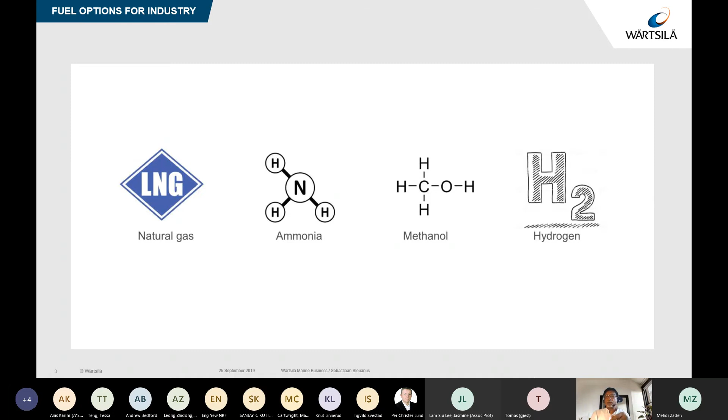A lot has been talked about hydrogen, so I'm just using the properties which are really a concern for maritime. These are the clean fuel options we're looking at: natural gas, ammonia, methanol, and hydrogen. These are general properties everybody is aware of, so I don't need to go into them, but what I want to highlight is the supercryogenic part of hydrogen, and the very low volumetric energy value, which leads to the space required.

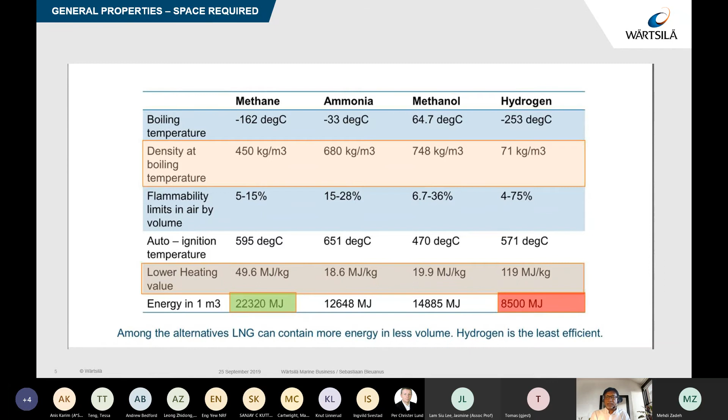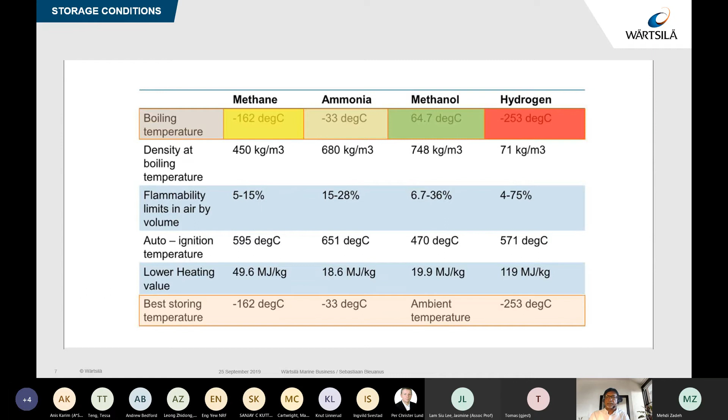The other thing about safety is the flammability part, which is extremely wide, and that's why it becomes particularly difficult to handle. I'm spending very little time on this slide so we can have a discussion, and I can give the Singapore perspective on hydrogen. The low cryogenic temperature relates to liquid hydrogen storage and the complexity it brings. These are generally the safety-related aspects: it's cryogenic, extremely flammable, risky in confined places, and these are the safety risks associated with hydrogen.

If we look at hydrogen today, when we look at Norway versus Singapore, we have to look at these differently because, as already highlighted earlier in the presentation, it depends on your available sustainable energy to produce green hydrogen. In Singapore, as Jasmine mentioned earlier, these have to be imported—we don't have green energy. And even if we prove we're using hydrogen, we're not really helping if it's produced from natural gas.

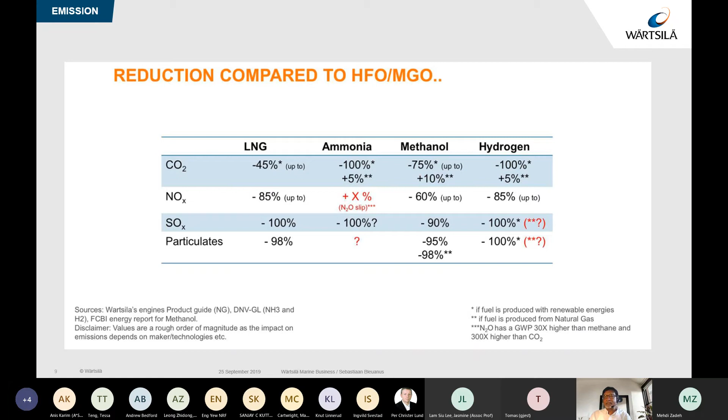All this together leads to some conclusions: if we're looking at LNG for 14 days, with ammonia it becomes roughly 8 days, with methanol it becomes 9.3, and with hydrogen it becomes 5.3.

So short sea—and I want to highlight Thomas's earlier presentation. We all look at shipping in a different way. When he commented on the DNV report, we all look at shipping differently. We have to look at it holistically. When we talk about shipping, we're talking about ships which represent 85% of the emissions, not 10%. So the DNV report, when looking at shipping, is looking at powering the large vessels. That's where it is, and that's why I want to bring it to the Singapore perspective now.

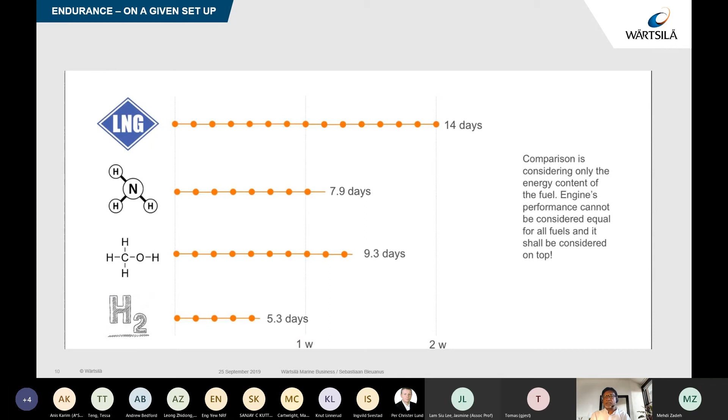As Wartsila, we are committed to 100% hydrogen engines, but where is this 100% hydrogen engines going to go first? We have to remember that only 2.5% of the GHG is being emitted by shipping. The remaining 97.5 on land.

Gas is going to be produced, hydrogen as a gas is going to be produced on land. It is the wisest choice to use that hydrogen on land and produce energy and save the environment. So we see that 100% hydrogen engines will be the first takers, will be land-based, but we are producing these engines for, whether it is for LNG, since I would say 1978 was our first gas diesel engine.

So since then we are producing these engines. Methanol, we already have a vessel which is operating, Stena Germanica, which for the last 5 years has been operating on methanol. Although now we are testing it both as gas as well as liquid in a different engine configuration. So that would be tested within this year.

When we are looking at ammonia, yes, we are testing. We have already conducted the first test, and we are going to do some testing later this year as well. And we have projects together with Norwegian customers where we are looking at both fuel cell being powered by ammonia as well as engines being powered by ammonia.

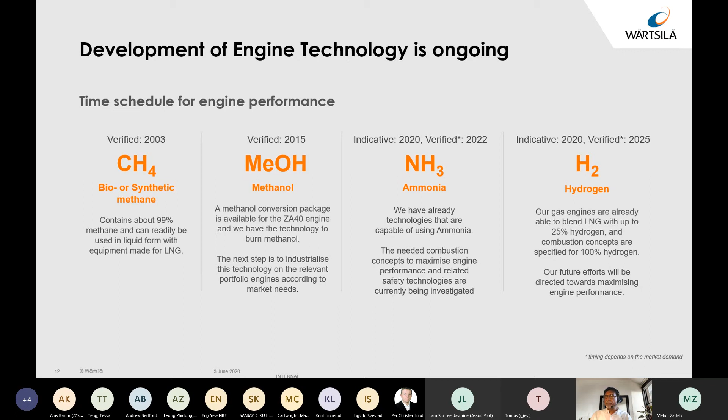Hydrogen, we already have our dual fuel engines which can run in a mixture of 25% hydrogen and 75% natural gas. But we are looking at 100% hydrogen engines, and we would be verifying it. So with hydrogen applications, certain safety systems are to be added.

So this is the test where it took place about the mixing - we mixed in both our dual fuel and single gas engines, and we have gone up to 30%. It can be used on the existing engines without any changes, just with added features of safety.

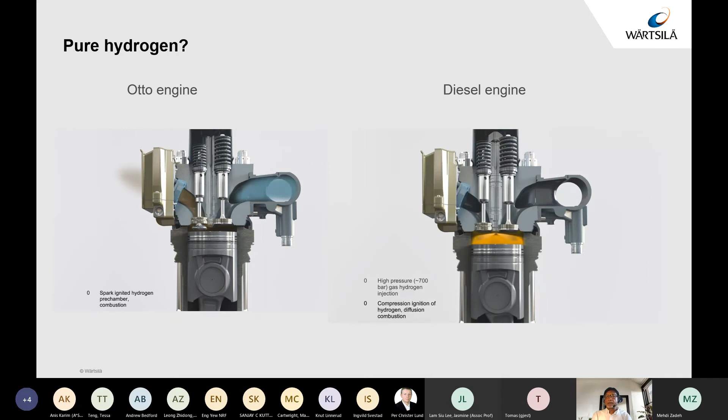We are going to be testing on both Otto cycle, a lean burn cycle, which will reduce the NOx emission, but we are also going to test it on the diesel engine in a diesel cycle. So both are under consideration, and we are working on this.

Now, because of the time, I have run through it very quickly. Pardon for that. But I wanted to come up with more points when we look at shipping segment.

Then hydrogen, whether liquid or compressed, and I totally agree with Tomas here, compressed is the right choice. But for what? For short sea shipping, for harbor crafts, it's the right choice. We can do that. And Singapore has a lot of these harbor and small vessels. That's where this, along with coastal shipping, short sea shipping applies.

For deep sea shipping, hydrogen, liquid hydrogen - I think I agree with DNV here, when it is going to come and in what way, whether it is going to come as liquid hydrogen or as a hydrogenated fuel, whether it is ammonia or methanol or some form of hydrogenated fuel.

Well, availability, infrastructure, regulations. Okay, regulations can come faster. But availability and infrastructure in the kind of quantities that we are looking at in shipping is the challenge.

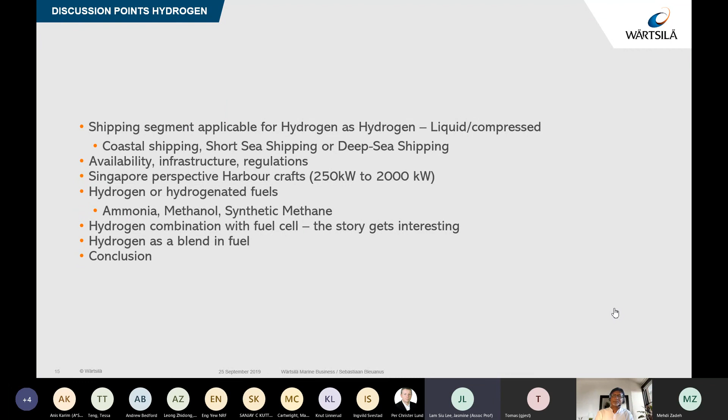Thank you very much. I guess we have good tracking of time. All right, so now, after the very interesting talks, we will have a panel discussion. In view of time, we have 14 minutes if we don't want to overrun. But I think that will be good because that will be a very nice summary and key takeaway.

And especially, I would like to ask one question, in the meanwhile waiting if there is anyone who would like to ask, for example, through the chat. But what is really key, especially combining the experience of Singapore and Norway in terms of hydrogen adoption downstream, in terms of, for example, maritime, what is really the key? It can include, for example, the opportunities and challenges that you can highlight to us, combining the experience of the two countries, if we are to really adopt it successfully, let's say.

I can interject a little bit. There's a lot that can be said there. One, it comes down to early adopters and experience. Tomas quite rightly highlighted some projects happening in Norway with regards to the ferries and so on and so forth. There's a lot happening there. And even us within DNVGL, we're developing regulations in a joint development project called MarHySafe, which is about maritime safety of hydrogen.